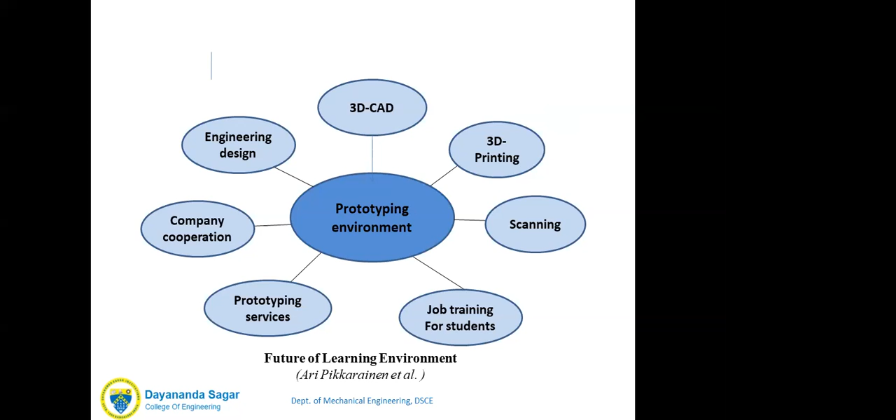There are strategies that can be adopted by industry to equip students with industry requirements—educational institutions need to look into this. What is required is organizing practical 3D printing learning environments, and implementing additive manufacturing into the curriculum of engineering degree programs.

To make this happen, it can be done by organizing practical sessions on additive manufacturing learning environments, and identifying learning based on 3D printing and its pedagogical development. Since 3D printing learning is directly related to additive manufacturing requirements, which can be connected to the experience level of students, the basic nature of engineering must be connected to additive manufacturing principles by identifying the need for pedagogical development.

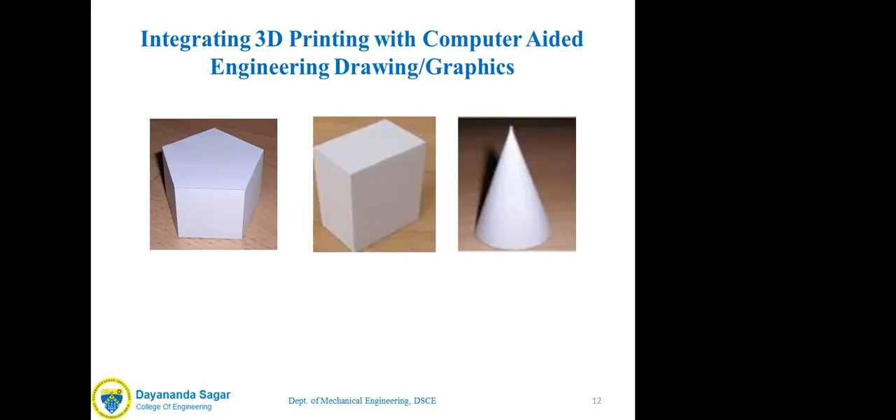So what we have done is at Dayananda Sagar College of Engineering, the students study theory and then print the parts in the laboratory. Ours is the first institution to include 3D printing for the first year students. They study the theory in the theory sessions, as well as print the models in the laboratory. So I will give some examples of how successfully 3D printing has been integrated with some of the courses.

So the 3D printing lab for first year, what they do is: first they draft, then they make a model, scaled down, and they print the models in the lab. This is how we have integrated the first year education, especially mechanical engineering sciences, with the computer aided engineering drawing and the 3D printing lab.

Coming to some of the models students print in the first year: the cam follower mechanism, pantograph. They may be asked to work in teams of 4 or 5, where each student prints a part and they assemble it. So they learn the basic mechanisms, as well as mechanisms that are theoretically difficult to learn. Easily they can 3D print and make the mechanism, assemble them, and it helps them in a great way.

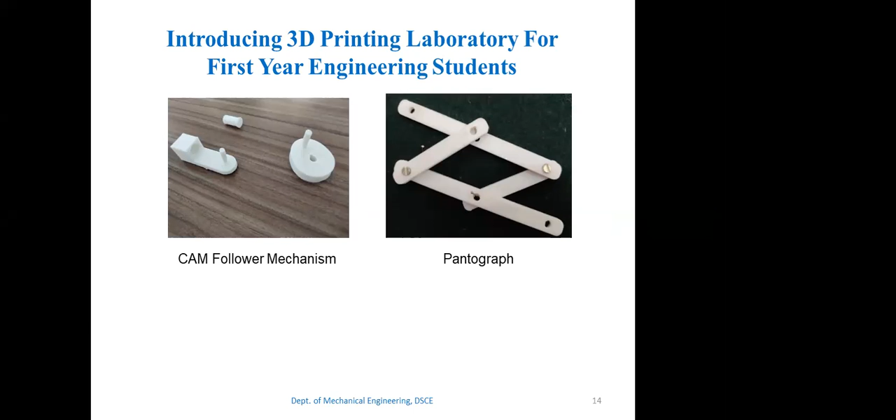And coming to the second year, how we can integrate 3D printing with computer aided machine drawing: the assembly parts can be done. Most universities are using softwares now — I don't see any institution using drafters nowadays. So 3D printing can be integrated with the assembly drawings as well.

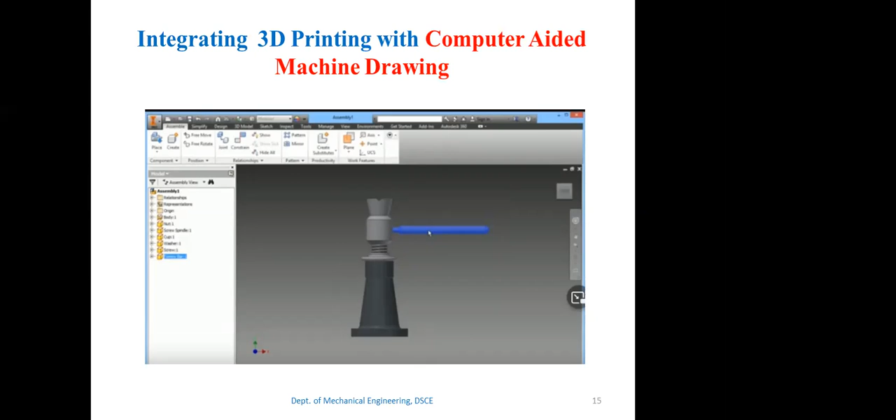Students can work in teams. They can model and make different parts, print them, and finally assemble the parts. These are some of the assemblies I have shown as examples.

And coming to mini projects and projects, students are given hands-on experience in the first year itself. They will be well equipped to use the 3D printers, and they can use them for mini projects as well as major projects. In our institution, whenever students require the facility, they can use it.

Just taking some case studies here on how my students have used 3D printing. This was a mini project on aerodynamic drag reduction in a bus model using CFD. It was major work during lockdown, when students had a lot of time. In this study, the effect of the passive flow device and the rear extension on reduction of overall drag was investigated. The actual bus model was designed, and CFD analysis was performed on ANSYS Fluent to find the drag generated by the bus.

Also here, a boat tail is attached to the rear of the bus to reduce the pressure drag. We found it considerably reduced the large recirculation zone in the wake at the rear end of the bus. But since we considered this major work, students were eager to publish it in a reputed journal. We tried to publish it in many journals, but it was rejected due to lack of validation. So we thought we would work on this matter, and made a scaled down model using 3D printing.

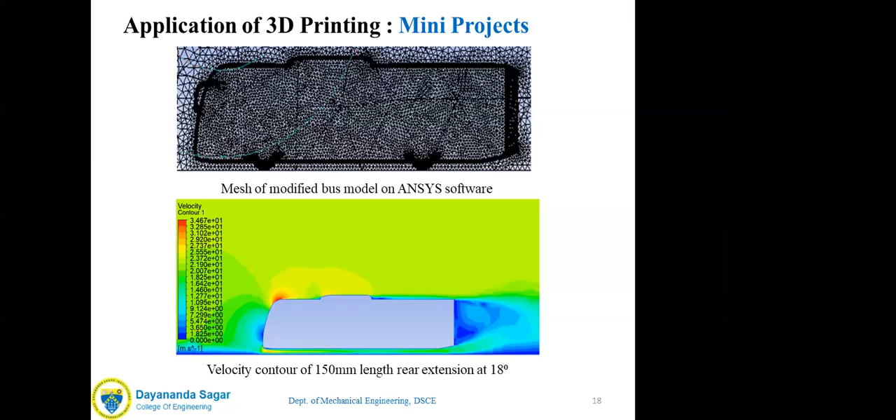The 3D printing... just a minute.

So we created a scaled down model with a 1:2 ratio by 3D printing, and did some more tests. We thought of doing experimental validation and conducted a smoke test in one of the laboratories in our college to check the streamlines around the bus. The modified models were also 3D printed and tested again, changing the dimension and shape at the rear end through various iterations.

As we have 3D printers, we should thank the institution. We were allowed to print the various models and tested them for a period of time. Then we got very good results.

So this is one example of how 3D printing, when students are well versed with the printing concept, they can use the 3D printers at various levels, and various courses can be integrated.

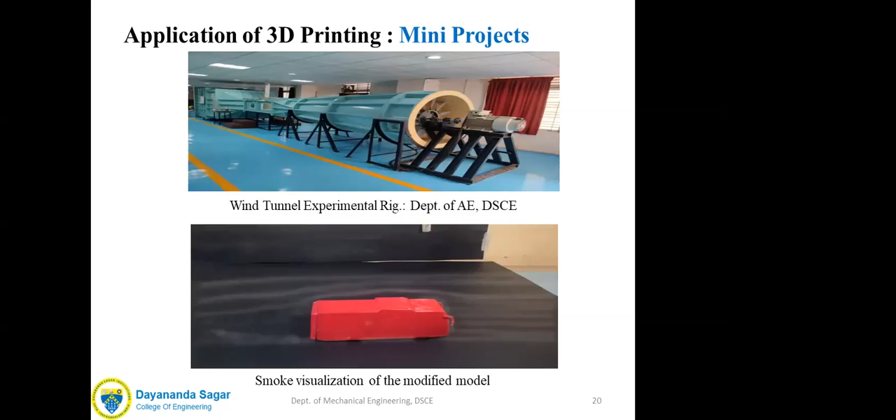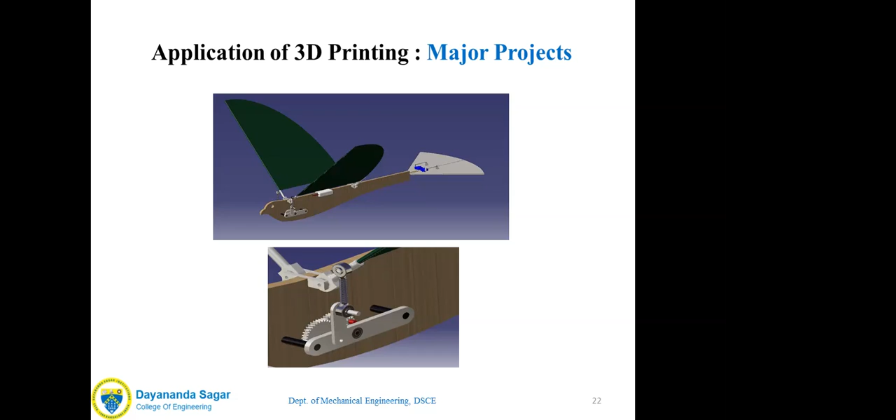Also, one more example is for major projects. One of our student batches is working on the design and development of an ornithopter. Because of the lockdown last year, we were unable to procure the components, so we thought of designing by ourselves. Students got into the lab, printed all the gears, and all the mechanisms were 3D printed in the lab, and successfully they assembled the component.

This is one of the model ornithopters that was developed in our lab.

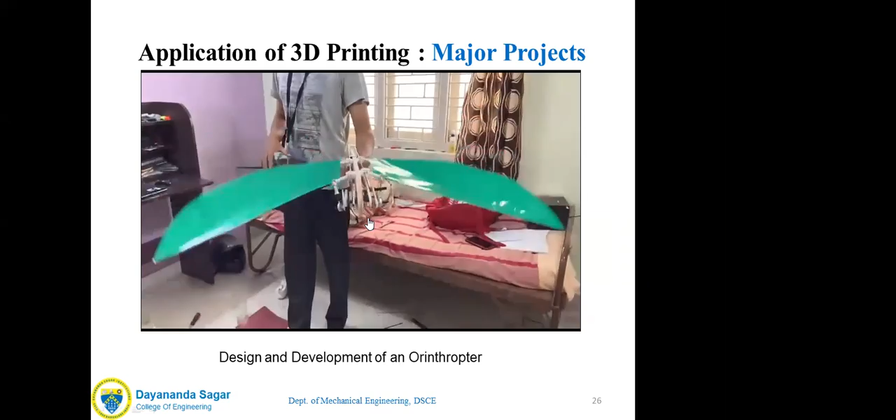That was the ornithopter well designed and developed by mechanical students at the Dayananda Sagar College of Engineering. Looking at non-mechanical courses and programs as well, most of them require some type of models to be prepared. Civil engineering and architecture students spend hours and days together just to develop the models.

As we have a program on architecture in our institution, I've seen how the students spend their time. Sometimes they work in teams for days together, sometimes until 10 or 11 o'clock in the evening, sorting out and preparing models using various materials like cardboard and wood. I had an interaction with the faculty at architecture.

Why not introduce 3D printing for creating models? They were very much satisfied because they had done some study on how institutions abroad are using 3D printing for creating models. This helps architecture and civil students in terms of money and time saving. A lot of time can be saved, and very accurate models can be 3D printed.

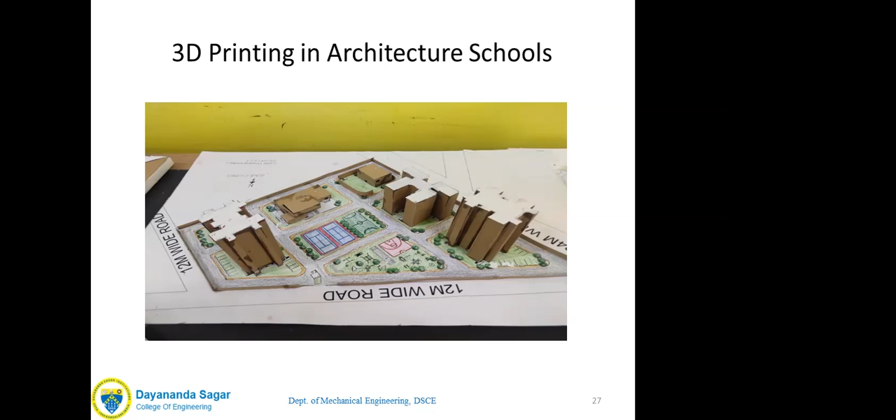So these are some of the models. For example, some institutions are already using 3D printers for printing models. These are some examples.

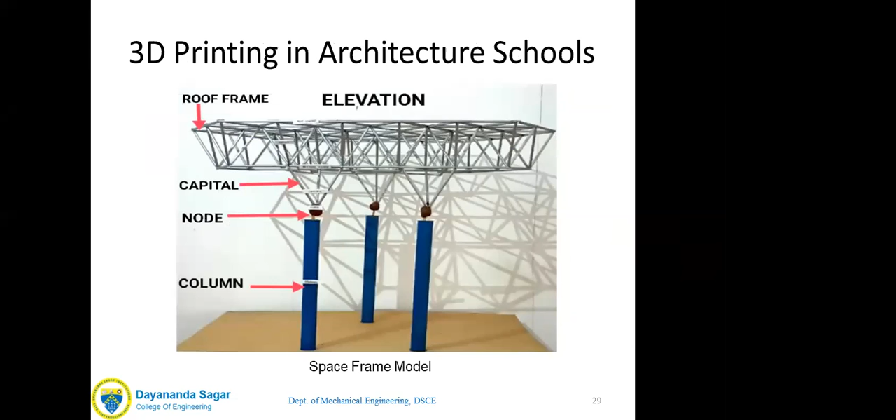From the literature, as well as institutions that have already introduced 3D printing as courses at various levels, we can conclude that learning environments require different process models, both from technological and pedagogical points of view, combined with 3D printing infrastructure. Future development of 3D printing education requires development of additive manufacturing learning, and the environments should contain up-to-date additive manufacturing equipment and the possibility for students to use them independently.

This sometimes poses a problem for institutions when it comes to investment. If they have to introduce 3D printing generally at all departments and all levels, some type of investment will be required. This requires a new view of engineering education, where traditional classroom lecturing can be replaced with versatile learning, while students can reflect, research, and analyze what they have learned through perceived learning.